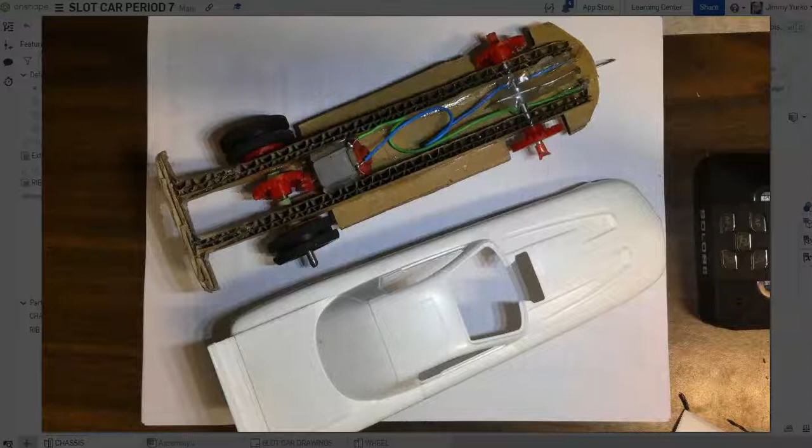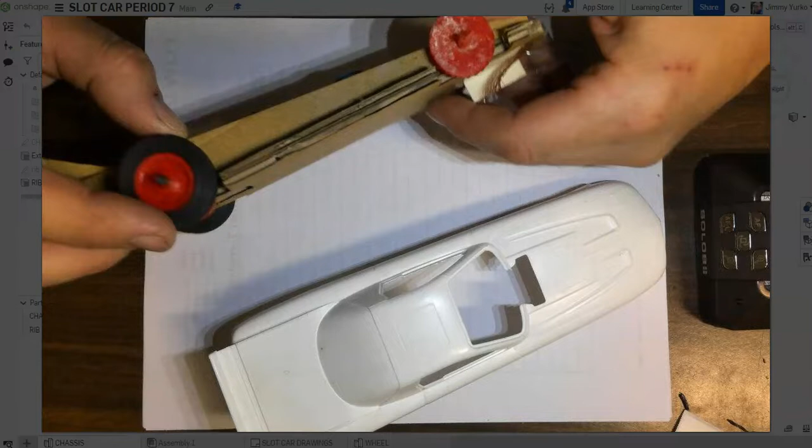So what are we working on? We're working on producing the car like this. We've got various components we've already drawn. We've already designed and drawn our chassis pan, or bottom plate. We've just finished up drawing the ribs for our chassis. Now we're going to continue in the model.

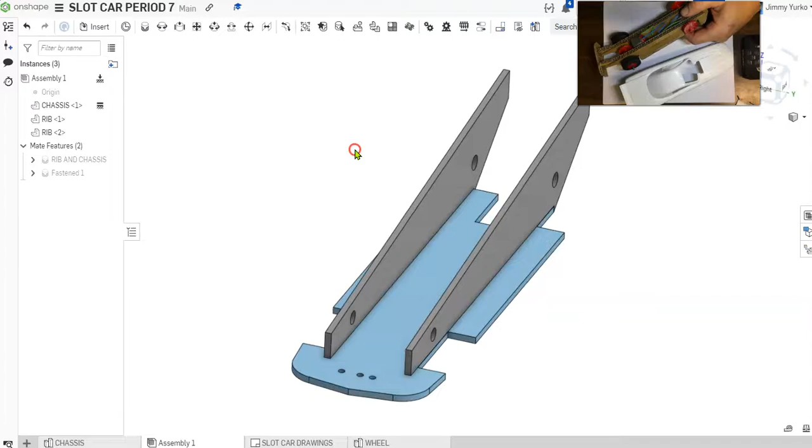Here are the two parts we've drawn so far. We've got our chassis base, pan, and we have our rib. We should have gone over and put those into an assembly. Check previous videos for help on that. Now we're going to go ahead and move over and add our ribs to the drawing.

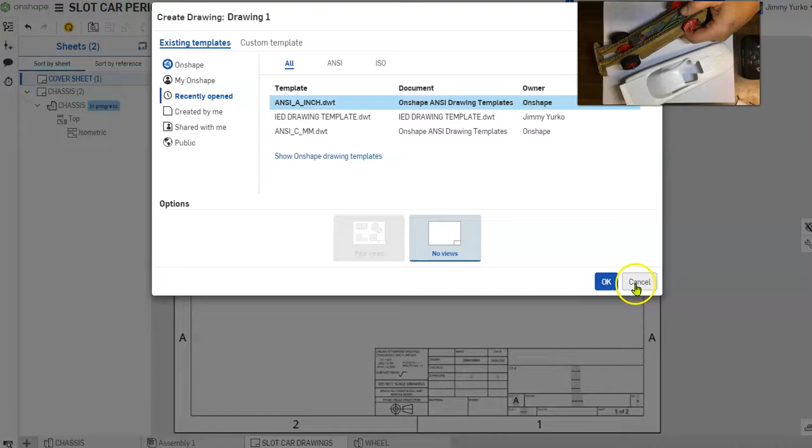If you haven't already started a drawing, remember that we can create a drawing by clicking the plus sign at the bottom left corner of the screen, choosing Create Drawing. When that pops up, you're just going to take the ANSI A inch template with no views and click OK. And that'll get you to a blank sheet of paper. It looks just like this.

Remember, we're not going to use the front sheet. We're just going to rename that and call it Cover Sheet. We'll come back to that later when we finish up the rest of the drawings.

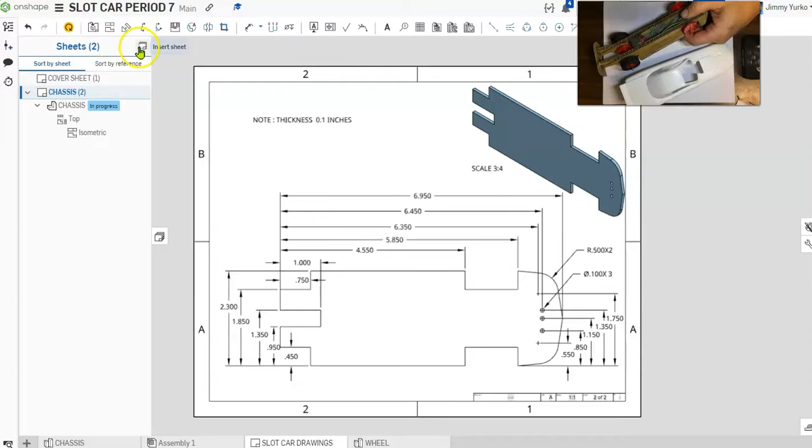The first drawing you should have created was called Chassis. Now we're going to add a new sheet right up here on the top of this pop-up box to the left. If that window isn't open for you, there's a button right here on the left-hand side that'll allow you to open that window up. And the Insert New Sheet button is at the top right corner of the tab on the left.

Here's our new sheet, and let's go ahead and add that rib. The Insert View button right up the top here. We're going to use this button just once per sheet.

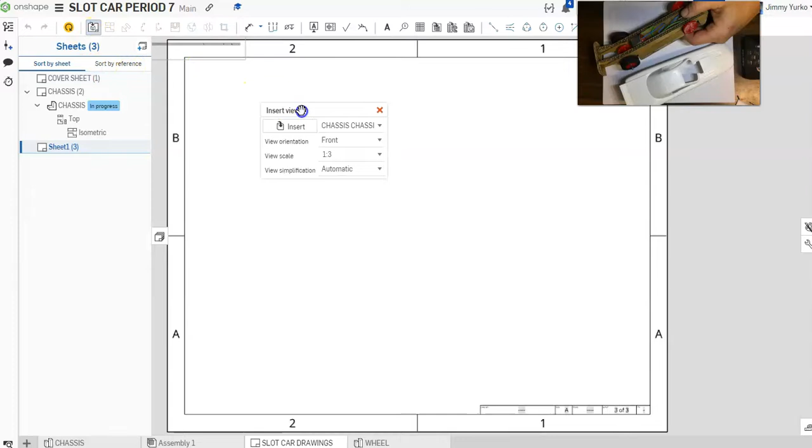You hit that Insert View button, and the Insert View window pops up, and whatever our most recent current view is will be active. We want to switch over to our rib. So we're going to open up our chassis, find our rib.

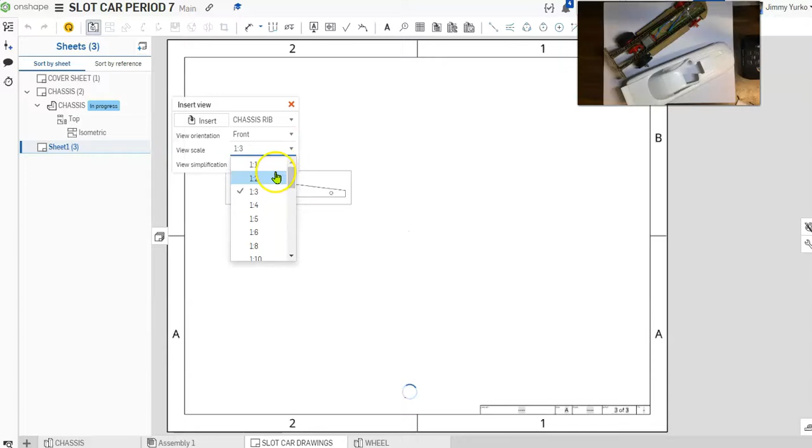Then we want to choose a scale that best fits. Now, almost all the time, 1:1 is the scale you want. That is the preferred scale. We want to make it actual size. The only time we use scales other than 1:1 is when 1:1 doesn't fit, because that's actual size.

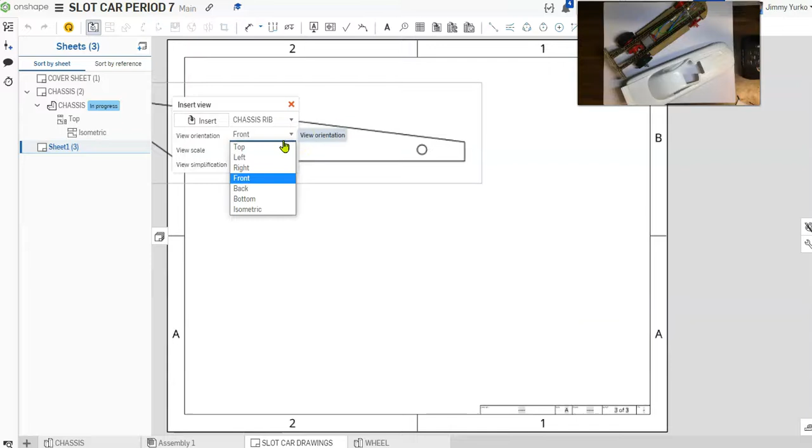You can see that the front view choice is going to work for me. If the front view isn't what you're looking for, you might need to swap your primary view by choosing the drop-down menu where it shows you the view orientation. So I want my front view.

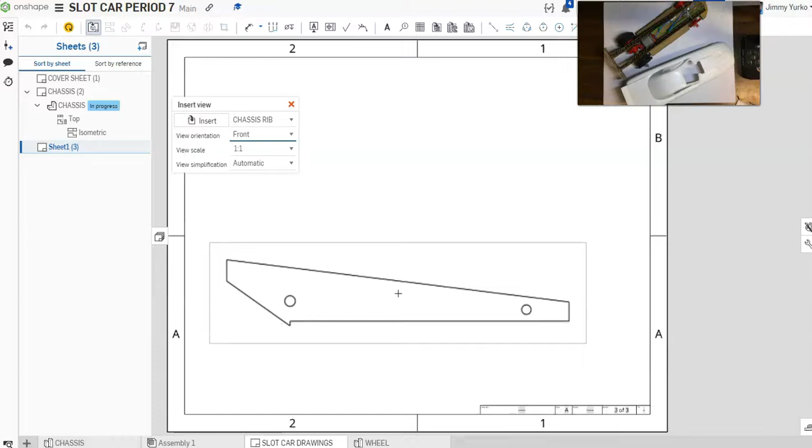I'm going to bring my mouse over to the middle of the page, lower middle, and this is going to be a... we'll call it a two view drawing. We're just going to have the front view, and then we'll click up into the right to choose the location of our pictorial view.

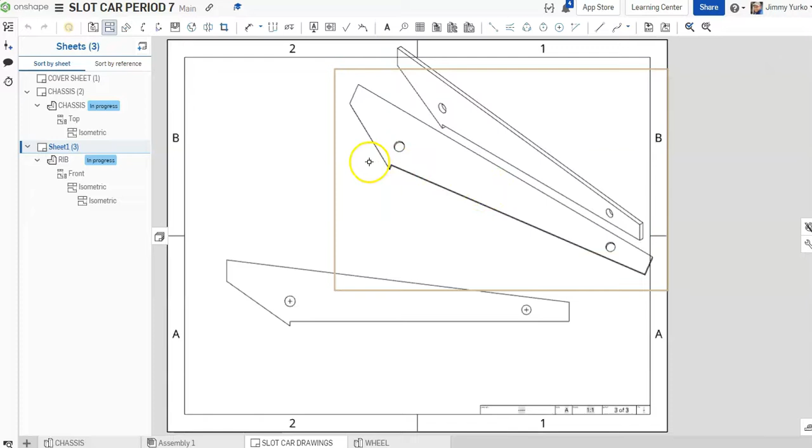Once we have the two views in place, we might need to do some adjustment. For example, that guy is a little too big for the space. Oh, I didn't want an extra view, so I'm going to Control Z that. Turns out I was still in my Projected View tool, so I'm going to hit Control and Z on the keyboard at the same time to undo that last move, which doesn't seem to be working for me right now.

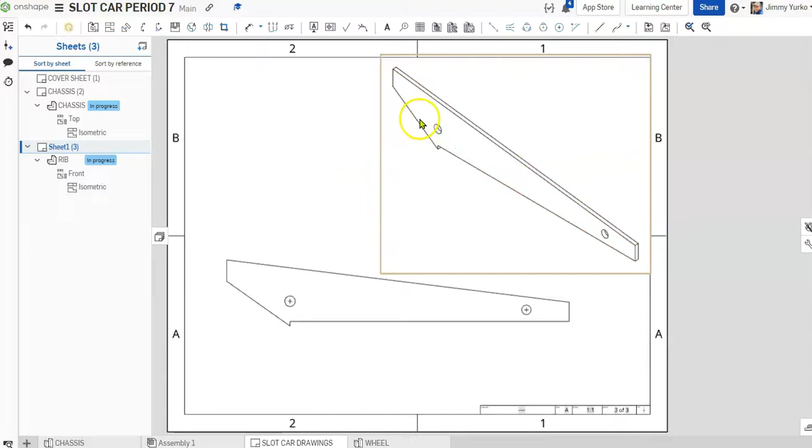So in that case, I'm just going to click the view that I just created, and on the keyboard I'm going to hit the Delete button. Now when I go ahead and drag that view, guess what I want? I probably want my view to be shaded, so right-clicking on it, Show Hide, Shaded View. And that gives me the colors and shades for my view.

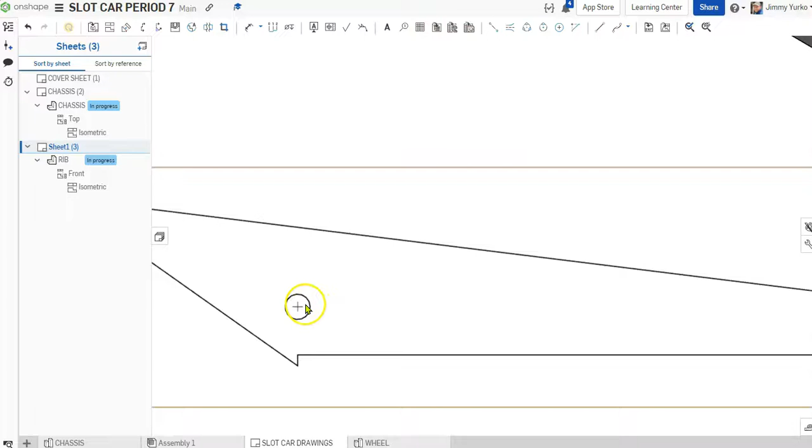Our front view is going to be where we add our dimensions. So let's go ahead and make sure we have all the dimensions added in here. Looks like I've got center marks for my circles already. I don't know how that happened, but that's pretty cool. That's helpful. We just go ahead and add the measurements for all the parts. Click and release. Make sure we go left to right, top to bottom, getting every single dimension. So left to right.

And if things don't fit, okay, this is not good. I don't want my dimensions to cross each other like this, so I just got to drag the biggest one out.

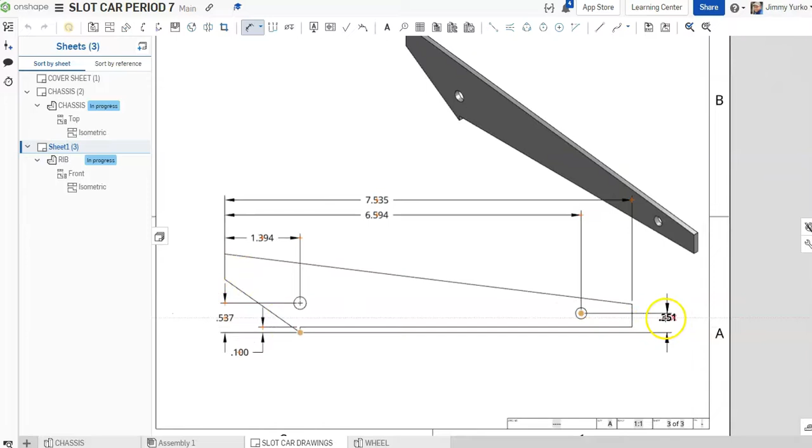Let's drag that one to the right, make it look better on the right, and bottom up.

Bottom up. So when you apply your dimensions, we're gonna start at the bottom left corner. We call that the datum point, and we're going to measure from that point left to right, bottom to top, making sure we hit every measurable point for linear dimensions.

Then we're going to add our dimensions for the size of our circles. There's the size of our circle, and we're going to have 2 of those, so we'll go ahead and edit that one by double clicking on it.

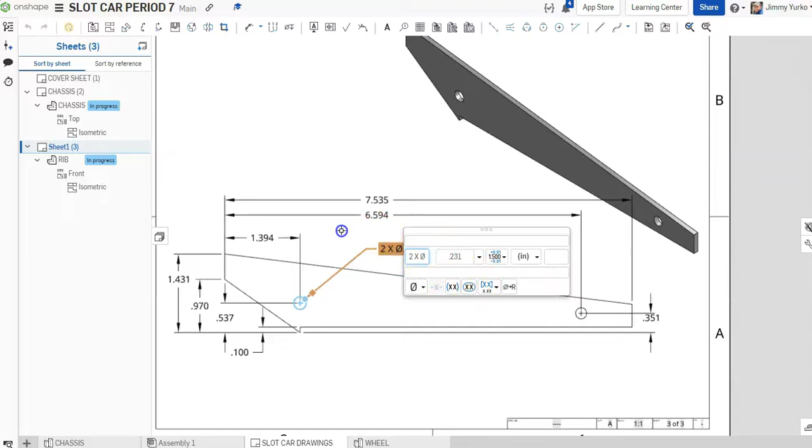And we change the dimension text from just diameter to 2 capital X, 2 by. I'm going to add that in the dimension text. Now that tells me that both of these holes have that same diameter.

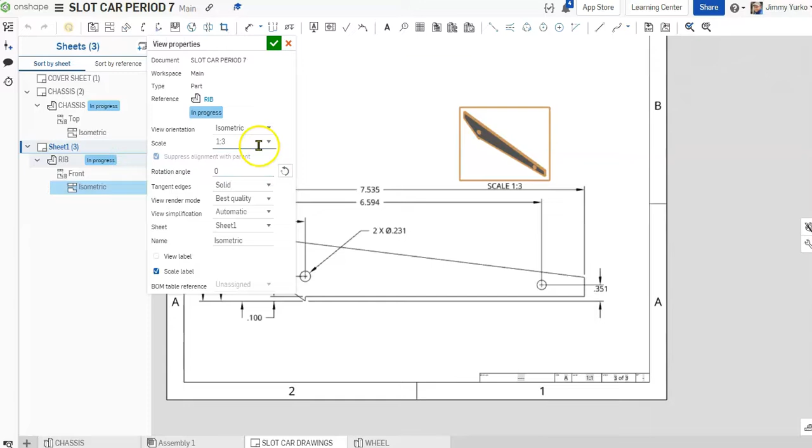Looks like my pictorial view is a little too big, so I'm just going to double click on it. I'm going to make that a little smaller, go a third. There we go. And there's the information we need.

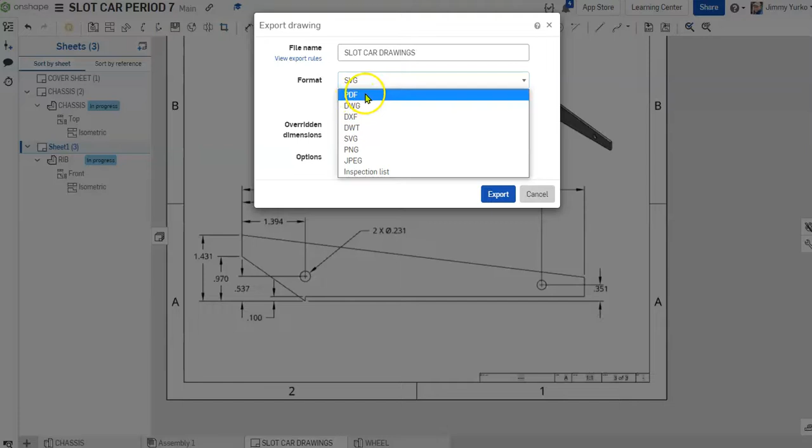So now this is printable, and we can print this out by right-clicking and choosing Export and switching it to a printable format like PDF. PDF format is printable on your conventional office printer.

Just click Export and don't change anything else. Click Export there, and it'll drop down in a few seconds. Wait a few seconds, and it should show up here in the lower left, and there it is. And now that's something I can open and print those drawings out, and you can see all the drawings we have.

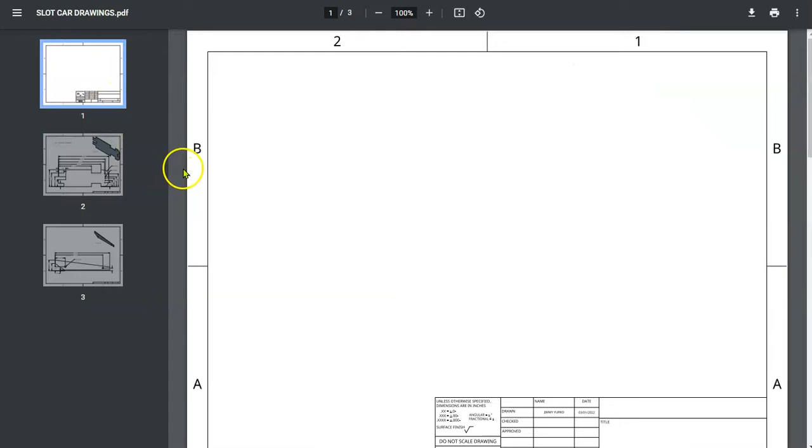So that's how you get that prepared for printing to paper, to get a drawing with all your dimensions. Now if I want to print this out, for example, to cut on a laser, I'm probably going to want to go ahead and just create a new drawing sheet that doesn't have all the extra stuff.

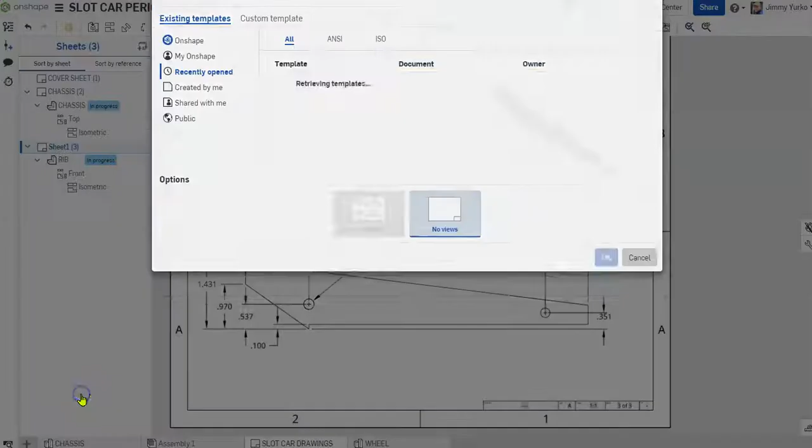This is actually pretty quick and easy, so I'm going to hit the plus sign to create a new drawing again, and I'm going to take the same ANSI A template and click OK. This time we're going to delete everything on the page once this opens up, because I don't really want anything.

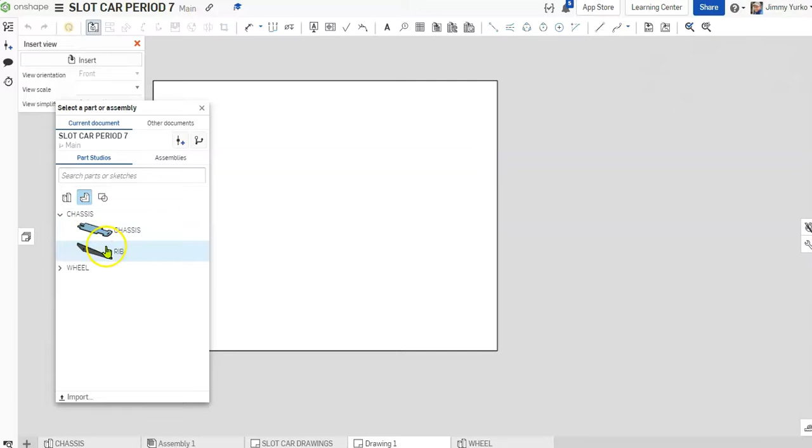I just want a blank space. So I'm going to grab everything on the page and delete it so I have a blank page. And then when we insert our view, we still want to make sure we go full scale, 1:1, and we're just going to put a single view on here.

This view is the view that I want to print. So this is now exportable. We'll rename that guy Laser Cuts.

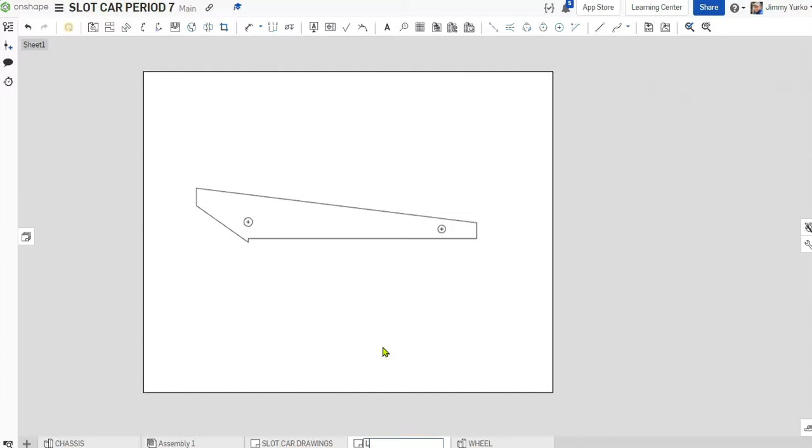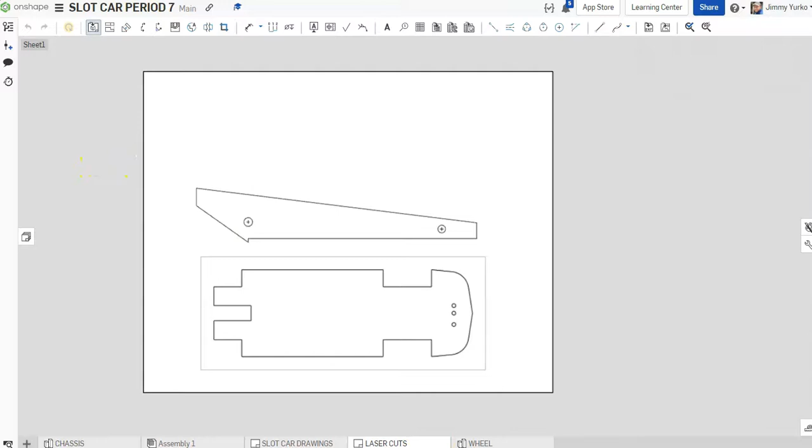And I can add my other parts on there as well if I want. So I'm going to insert another view from another part. That other part will go our chassis, and that's going in our top view for that. So now here are the parts I need to laser cut, and I've got that labeled laser cuts.

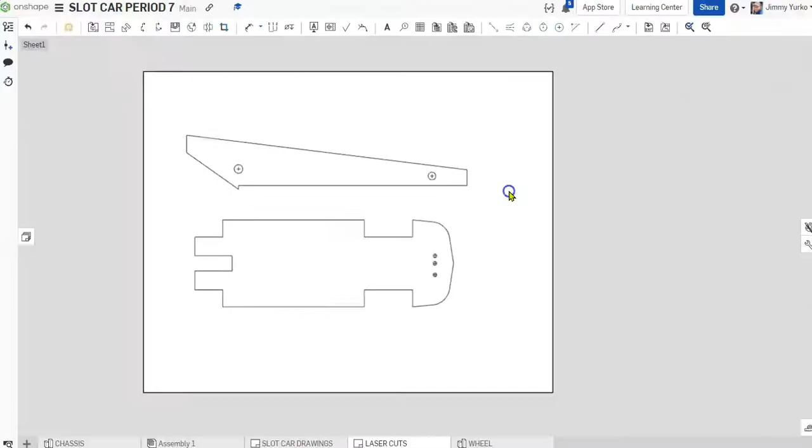We can move them around, but this will allow us to export these drawings. So right click and export, and this time instead of PDF we're going to use what's called SVG, scalable vector graphics. We export that, and that'll allow us to have a file format that we can open up in the software we use to drive our laser.

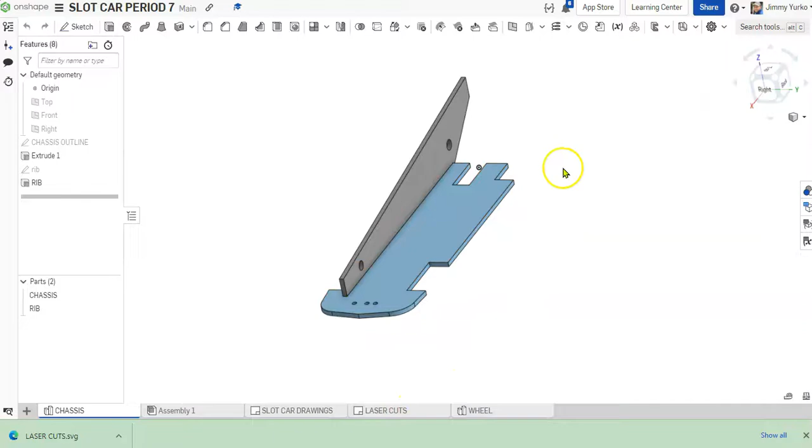Those are the steps to get you from your model to parts that we can cut out so that we can cut the bodies, the chassis frames for our parts. And so what you've just drawn, just a review, you've drawn the bottom pan for the car, and you've drawn the ribs for the car. You provided places for the axle holes when you created those ribs, and cutouts for the wheels.

And now we've created a printable drawing that we can use to either print on paper, so we can have documentation to create it by hand, or print it on paper to make a template that we can trace and cut out, or we can go directly to a machine like our laser cutter to cut out the outlines of our parts.

So hopefully this helps you out and gets you ready. Create cool stuff, and as always, keep being awesome.